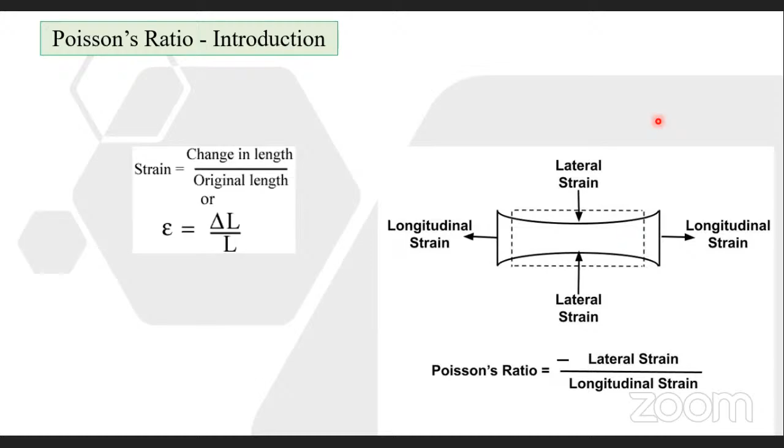So, for example, the length is 10 centimeters. On pulling, it becomes 15 centimeters. In the contraction direction, consider it having 5 centimeters, so it will change to 3 centimeters. So there is a change in dimension. The change in length divided by the original length gives the strain, where change in length is the difference between the final length and the initial length.

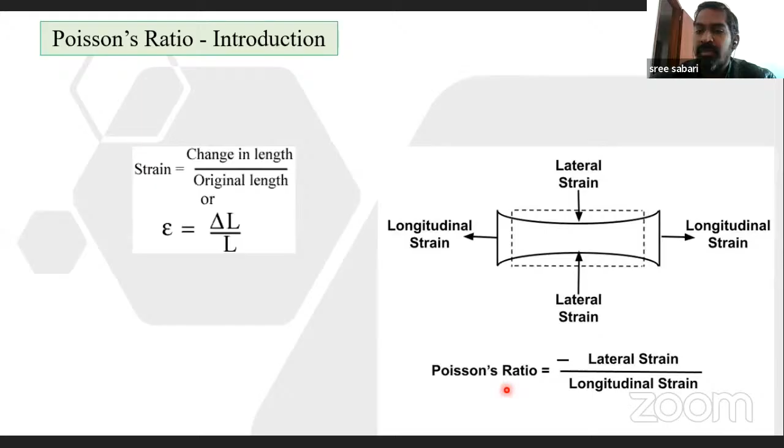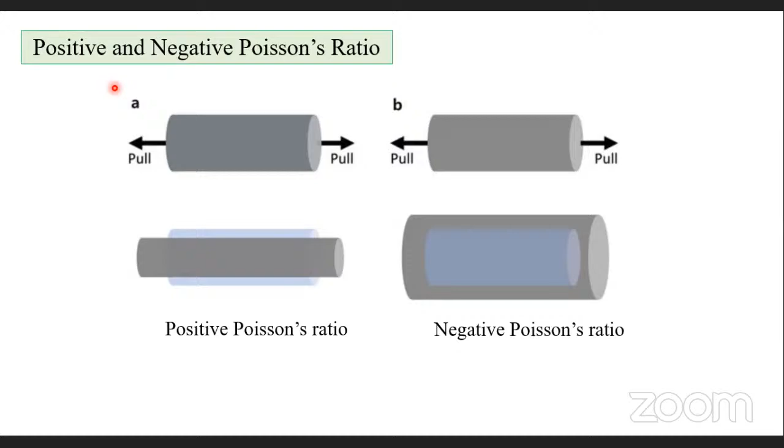With these equations, you can calculate the strain, and the strain can be used to calculate the Poisson ratio, which can be mathematically represented in this way. We have two terminologies: positive Poisson ratio and negative Poisson ratio. The positive Poisson ratio is the conventional one seen everywhere in engineering systems, not only there but even in the chocolate wrapper, you can see the positive Poisson ratio.

But there is another concept called negative Poisson ratio. In this figure B, you can see the schematic representation of the negative Poisson ratio. If I pull a material, it will try to expand, which is converse to the positive Poisson ratio. So when I pull or push the material, an inverse thing happens in the cross-sectional area. In the negative Poisson ratio, if you pull a material, an increase in length happens in this direction as well as an increase in length in this direction too, so the diameter is increasing. This is a negative Poisson ratio.

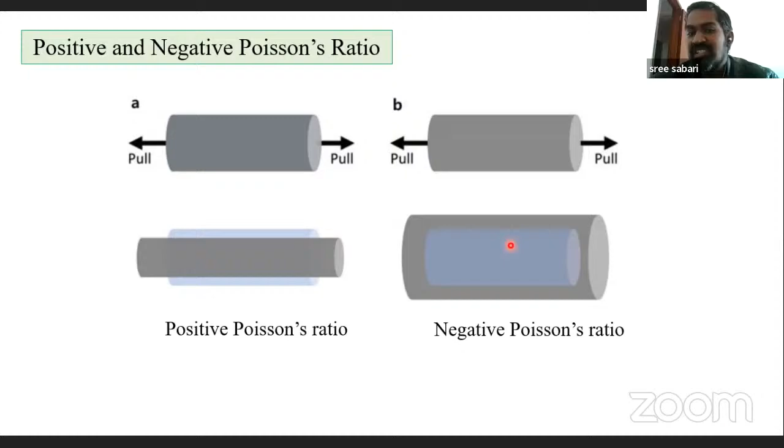Just think, in this case, if instead of a compression or a reduction in this cross-sectional area, you have an increase in cross-sectional area, will the game end soon?

No, the game will extend, which means the failure will extend, which means the material or the structure will remain for longer time.

So coming to here, if you see the various engineering materials in practice, you can see foams, cork, rubber, plastics, and other materials like steel, carbon fiber.

In these materials, you can see that the Poisson ratio value lies between 0 to 0.5. So if you are a mechanical engineer, you might come across a lot of calculations for understanding the stress or strain or the stress distribution.

You must come across the Poisson ratio value, and we used the Poisson ratio of 0.3. So for the metals, most probably it is 0.3, and it lies plus or minus like 0.05.

0.3 plus or minus 0.05. So if you see the steel, 0.3 is the Poisson ratio.

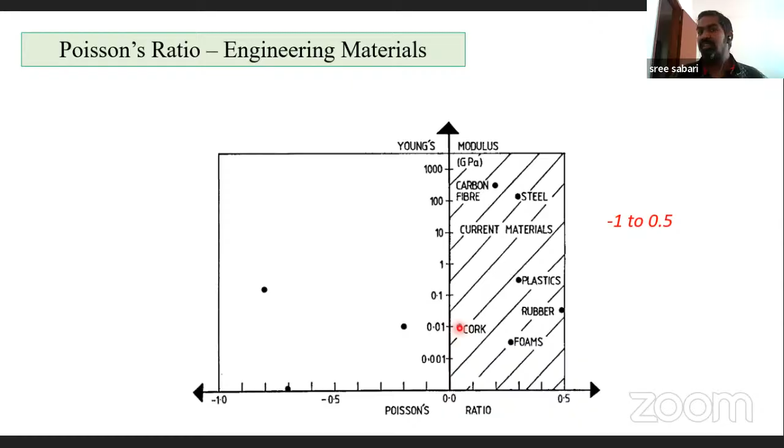And if you have a lower Poisson ratio in the positive system, which is near 0, it's neither positive nor negative. So you won't have any kind of thing. With respect to this expansion and contraction, we can see a lot of applications.

Coming to the scientific database, Scopus is a scientific database where we can see the number of research or amount of research published in a particular area.

So this proves that this material is having a lot of potential for various applications.

Okay, so coming to this Poisson ratio, as I told, the Poisson ratio is going to enhance the property. So how is this possible?

What are the things that are happening there when you are using an auxetic material? Okay, so the first one is the bulk modulus.

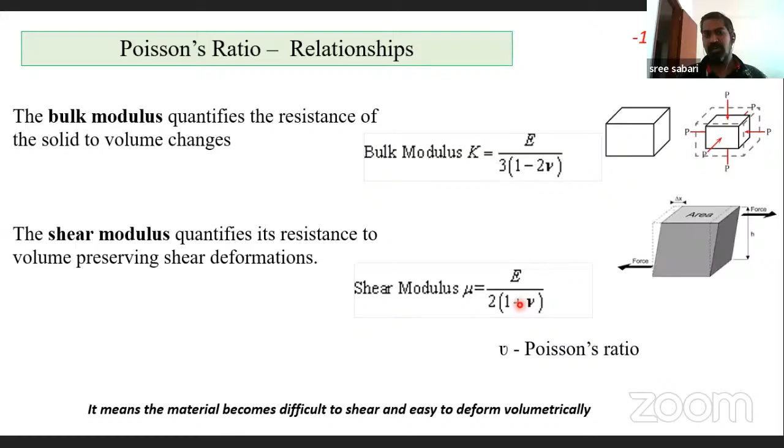Okay, so here you can see that if I insert 0.5 in place of the Poisson ratio, K will go to infinity. And if I place 0.5 here, you will have a lower shear modulus. So if the Poisson ratio is positive, you will have a higher bulk modulus and lower shear modulus.

On the other hand, if I insert -1 in place of the Poisson ratio, what will happen? You will have a different bulk modulus, but particularly notice the shear modulus. If I insert -1 here, 1 minus 1 becomes 0, and the shear modulus is going to increase. This is a very much wanted property of the negative Poisson ratio. It means the material becomes difficult to shear, but easily deforms volumetrically. By using this property, you can tailor a lot of other properties for different applications.

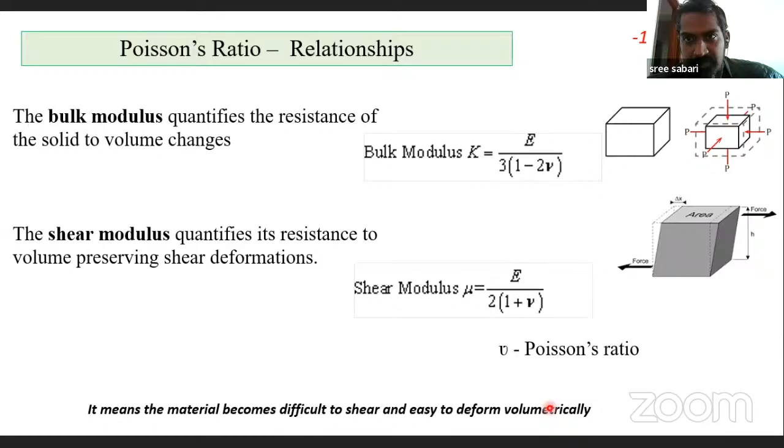Okay, so coming to this auxetic material. As I told in the very first slide, this auxetic material is not a real material like a metal or polymer. We know about a lot of material types. We have metals, we have composites; different types of metals are there, steel, aluminum, and we have composites, metal matrix composites, polymer based composites.

So here the term material doesn't represent the type of material; rather, the material represents the geometric feature. In other words, an auxetic material can be made using steel or polymer or composites or ceramic or whatever it may be. Someone hearing this word auxetic material will initially be confused, thinking this may be a new or novel material. This is not a material type. This is not the case. This auxetic material is a term related to the geometry of the material.

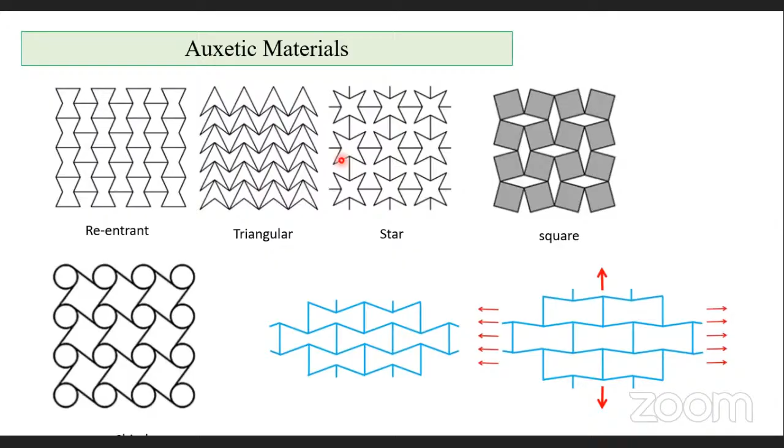For example, these re-entrant structures can be modified into hundreds and thousands of structures, and this triangle you can modify into hundreds and thousands of structures. So how can you modify that? For example, if you have a re-entrant here, in the corners, at this junction point, I can include a circle like this, so you can evolve a new geometry. And even in the star I can include a triangle like this, so you can invent a new geometry. So auxetic materials keep on going based upon the requirements. They can keep on changing, but these are the conventional or basic structures which give the negative Poisson ratio.

So how do these geometries give a negative Poisson ratio? These are also made with conventional materials like steel, aluminum, or composites or polymers. And how is this material different from conventional materials? Here you can see an example. This is the re-entrant structure, and on pulling this structure, what's happening? It is undergoing an expansion. What is happening in the conventional material? If you pull something, this region gets compressed or contracted, whereas here there is an expansion. How is this expansion happening? We will see from here.

In this figure, as I told, an expansion is happening here. I have magnified this image by only considering this inclined portion. Now I am showing the inclined portion alone, and you can see that there is a movement happening here. When you are pulling the material, there is an angle between the vertical member and the inclined member. When I am pulling it, this angle is trying to increase so that this member is trying to lift upward. So by changing these geometric profiles on loading, you will have an expansion in the center.

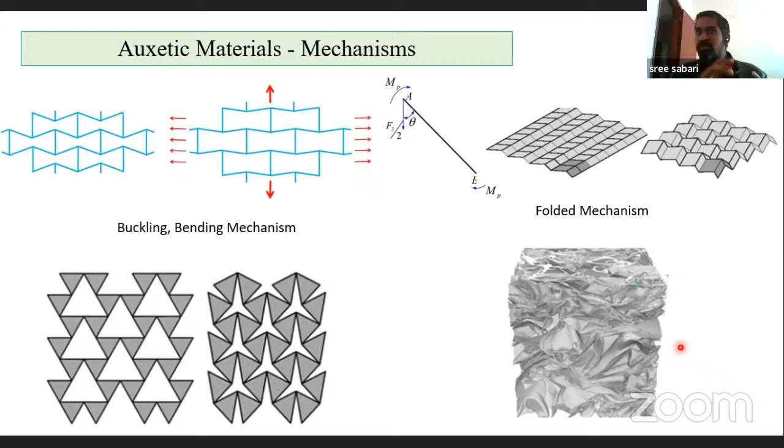The next one is the crumple type mechanism. Here you can see it's in a very crushed form. I can explain this with a real-time example. Take a paper, crush it, and put it on a table or throw it. After releasing the load, it will try to come back. So it is completely crushed on loading, and if you release the load, it comes back. That crushed way of material deformation can also be tailored to serve a desirable function.

Coming to here, let me continue with the various advantages. The first one is variable permeability. In simple terms, the materials have a lot of holes, which can serve some applications. Even your cloth has permeability. The holes there help the cloth breathe, so there will be airflow between your body and the outside. You can find permeability in a lot of applications.

I need to highlight one thing here. Seeing these various geometries, some people may wonder why honeycomb is not an auxetic material. A lot of people might have heard about honeycomb structures, which are applied in various applications, and because of their lattice, they have larger energy absorbing capabilities. It also has a cellular structure, regular and periodically arranged. So why is it not auxetic? Let me explain.

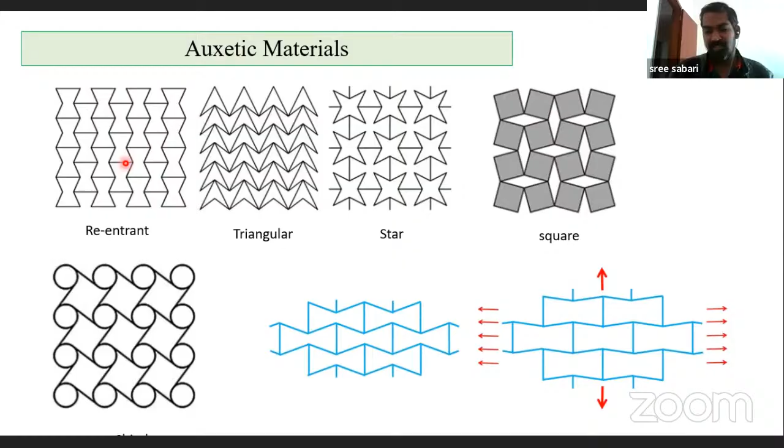So you can reach from this shape to this rectangular shape. Okay, so when you are applying a pulling or a pushing force over there, you will have a uniform increase in the void area in X and Y direction. So this is a very good property which can be used for various purposes.

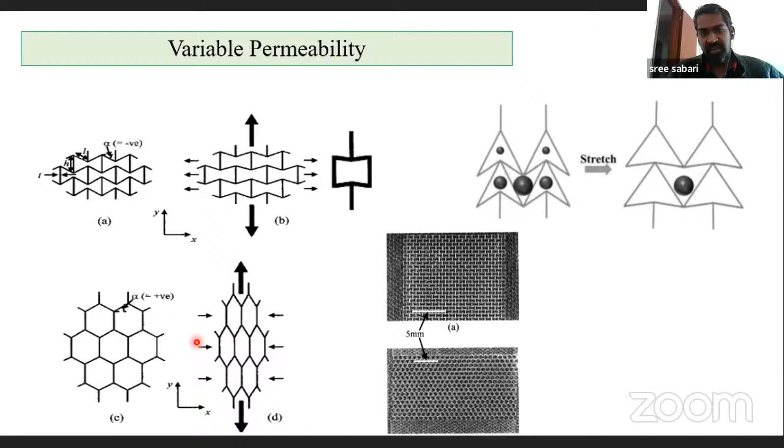Okay, so here in this picture you can see there are two filters made with the reentrant and the honeycomb structures. Okay, so the next beneficial characteristic of auxetics is indentation resistance. So what is indentation resistance? Indentation resistance can be related with hardness as well as with impact. Indenting is when you have a harder ram or harder material, and you are applying a force over a material, you can find a deformation. So that is the indentation.

For example, if I'm applying a pressure, you can see that my hand is indenting inwardly, which means a deformation is happening inwardly. Okay, so this is the indentation. So in real-time applications, a material should have a higher indentation resistance. Either it may be loaded at a lower load rate, or at a higher load rate. In both cases, we need this indentation resistance. So this auxetic material will have a better indentation resistance than the conventional material.

Okay, so how the conventional material behaves and how the auxetic material behaves, we are going to see here. So the first figure shows how a conventional material behaves. This is a ball indenter. Just consider this is a ball made up of some steel, and this is a rubber material, for your understanding. So consider this harder steel ball is indented against the softer material. So what is happening there?

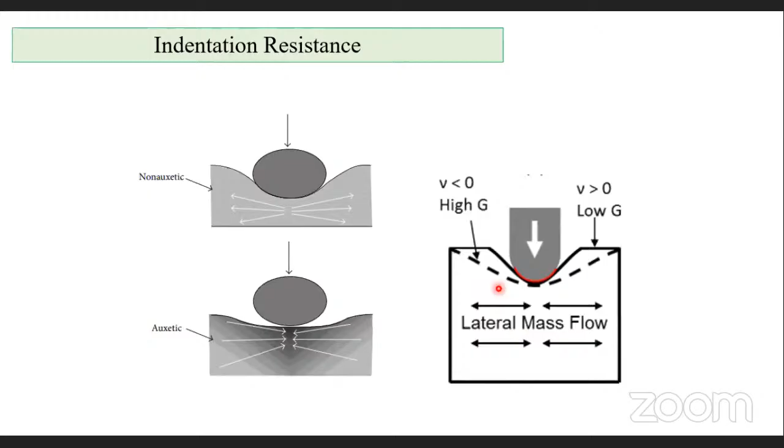Again, I'm saying that you need to tailor these mechanisms in order to make it beneficial. If I'm saying auxetic material, it is not completely beneficial. You need to tailor that, alter or optimize the behavior in order to fit your applications. As I told before, if you have a higher shear resistance, this will also influence the indentation resistance. So the Poisson ratio is associated with shear resistance, and the shear resistance is associated with the indentation resistance.

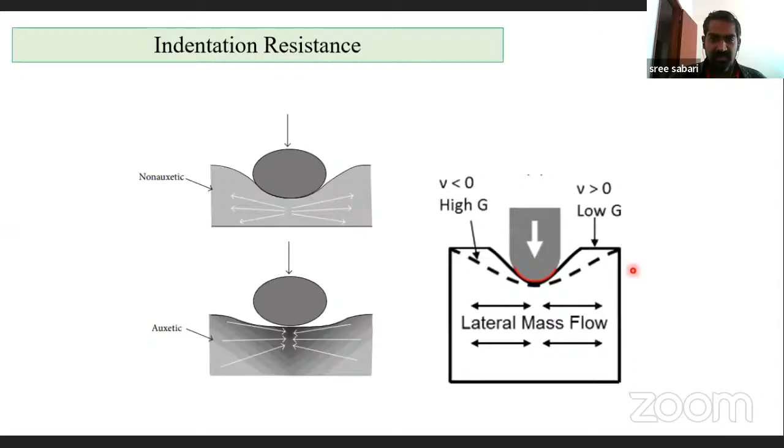And I will also give an example. If your car crashes into a wall, you can find a kind of deformation, not a crack. It will have crushing or bending, but not a crack. So in that way, these types of things are very much appreciated. So the next one is synclastic curvature.

For example, if you are going to apply this material for such applications, you can use this for a helmet, you can use this for a knee pad. It has a higher flexibility to deform to respective shapes.

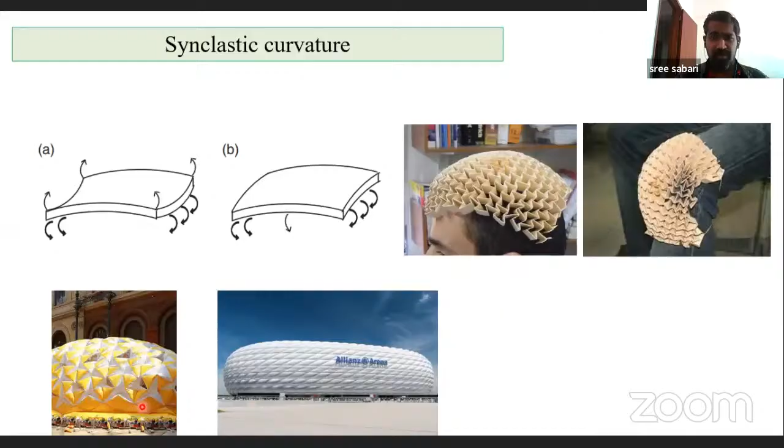So that's one type of application. Another type of application is this can be used for creating building structures, either in the form of polymer-based sheets, or for aesthetic looks. Here you can see two examples of using this curvature to build structures - you can create temporary or permanent structures, so you need to tailor accordingly.

under the hard shield. Why do we have that? It offers some kind of cushioning effect - that's the first reason. The second is it gives energy absorption capacity. On loading or impacting, if you fall down, it gets impacted there and absorbs some energy. That's why we use a foam.

So can an auxetic be a foam? Yes, of course, auxetic can also be a foam. But not all foams are auxetic. The auxetic foam needs to perform negative Poisson's ratio, but conventional foam just needs some kind of air voids or void regions - that's enough for conventional foam.

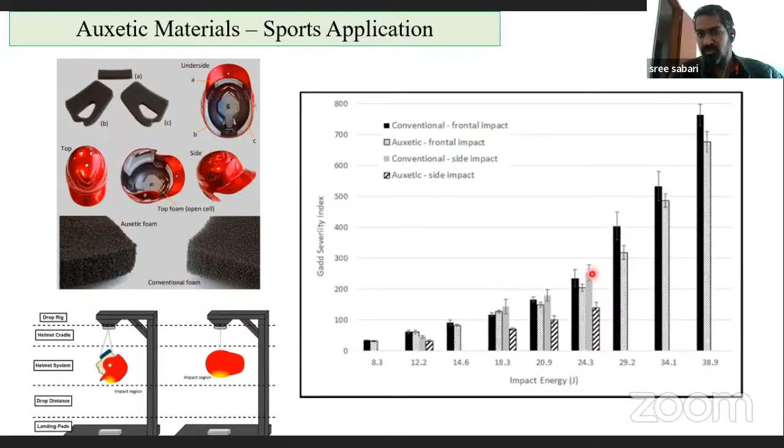In the side impact too, you can see the auxetic material has lower severity compared to conventional - especially in this case, nearly half the performance is improved. The value is nearly two times bigger for the conventional material, so this is a beneficial property.

And the next one is higher fracture toughness. This is also an important thing. As I told before, this material can avoid cracking, or can postpone crack propagation, or can avoid crack initiation. These are the terms related to fracture toughness. If there is a higher fracture toughness, there will be a higher resistance to cracking or crack propagation. So this is the idea.

So how is this happening here? In the conventional material, a lesser amount of energy is required for the crack to open. Consider this is a crack, you have a gap here. In order to propagate this crack to a bigger size, you need to open it. On opening of this region, the crack will propagate. For the auxetic material, the energy required for crack propagation is higher, so in that way it offers higher fracture toughness.

Here you can see there is a critical tensile stress. A critical stress needs to be created in order to propagate a crack. This has a relationship with the Poisson ratio. Since the critical stress is related with the Poisson ratio, we can tailor the Poisson ratio to negative and increase the resistance against fracture.

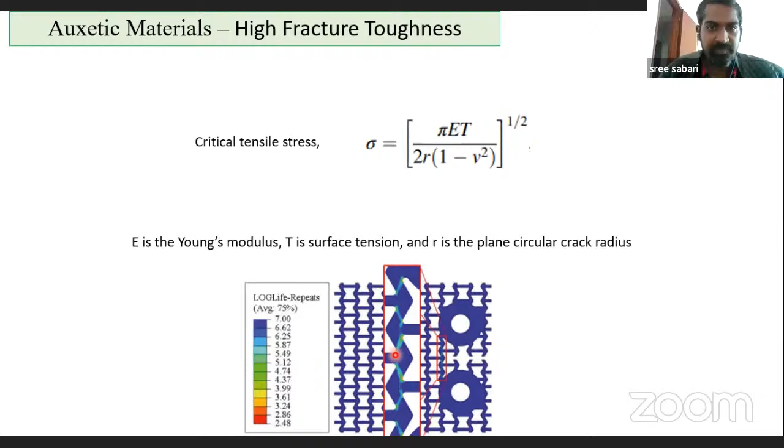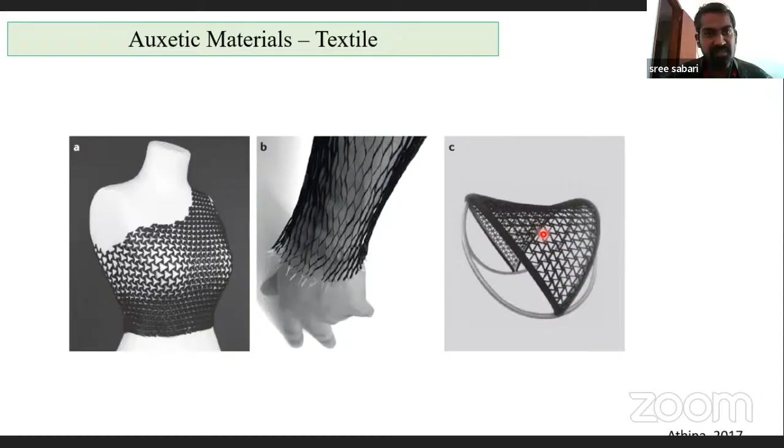Okay, the next one is how these auxetic materials can be used for defense. As I explained in the previous slides, it has a good energy absorbing capacity since it's a cellular type. And how this is possible, what is actually happening there, we can see that.

So in that kind of vehicles, you can use this auxetic material. Since this auxetic or cellular material, the weight of cellular materials is much less than bulk continuous material, that's one advantage. And the second advantage is it also performs good impact resistance or good ballistic resistance.

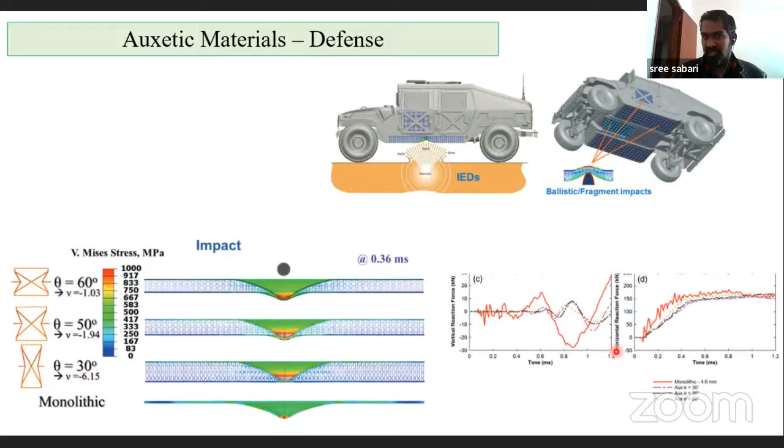For example, you can use this to arrest the vibration. You can decay the force and you can arrest the vibration. So it can be used as a shock absorber. You can use this in an auditorium. The sound is a wave. That wave can be decayed. So you can use it as a vibration arrestor. Then you can use it for acoustic purposes. So this has many more potentials.

Okay, so far I have explained a lot of advantages about this. Then you may have a question. The publications started arising from the 2000s. Now we are in 2020, almost a lot of years. Still, why does it not have potential in various applications? Because there are some challenges associated with this. This is a very important part of my presentation, because this will be useful for a lot of researchers or academicians. They can work on this as a project or some kind of proposal. So it has a lot of challenges which deteriorate its applications.

The first one is design complexity. As I mentioned in many of the slides, you need to tailor the geometry. That means not all geometries show a beneficial effect. So you need to optimize the geometry first, which means the shape of the auxetic material, like re-entrant, chiral. You need to select the geometry based upon its mechanism, whether it is bending, buckling, or rotating. Then after selecting the particular shape, you need to optimize the geometry parameters, for example the length, the angle, the length of the inclined members, the thickness of the strut. So it's very difficult to design it.

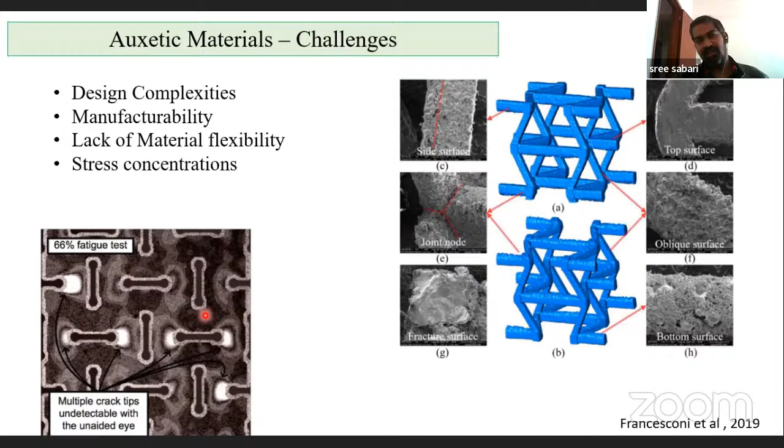The next one is stress concentration. If you are using a metallic auxetic, again, there is an issue called stress concentration, which is very important. Here you can see a picture of a specimen used for the fatigue test. There are a lot of sharp corners, which have high potential for crack initiation. In one of the slides, I explained that it has higher fracture toughness, and here I'm conversely saying stress concentration. So you need to overcome this stress concentration in order to achieve that good fracture toughness. So by this, I'm closing my presentation.

So these are the conclusions. Because of the unique way of deformation of auxetic material, it has high flexibility and adaptability to various applications. You can tailor the geometry and the material used for the geometry for various applications. So there is a lot of chance to explore. I wish everyone to read more about this, because this is a very big topic. Since the meeting consists of people from various streams, I explained it in a very limited way. I'm not going into any in-depth things.

So I ask you to look into it; though you are from different streams of engineering, this auxetic material will have some kind of application there. Even this can be used for piezoelectric materials as well, so people from electrical backgrounds can use it. This material can also be used as a heat sink in electronic systems. In electronic processors, heat generation is an important thing. This material has higher heat transfer capability; since it has a lattice, the airflow will be more. So electronics people can also work on it. There are a lot of applications.

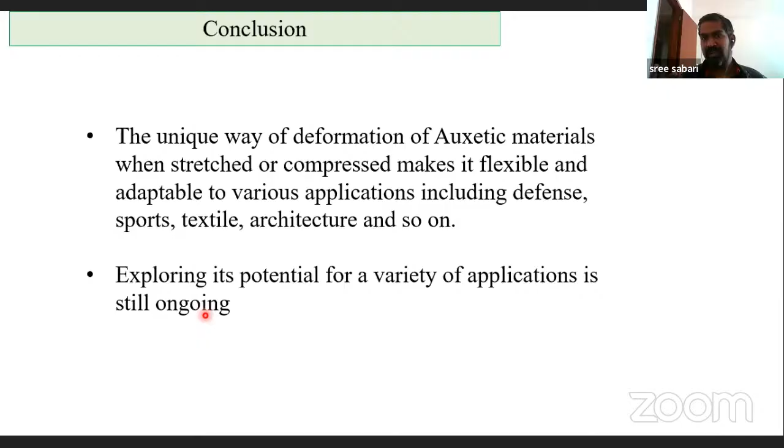A lot of biomedical researchers are also going there. Even for heart stents, people are now using auxetic materials. The stent will expand in order to fit the region, and a lot of other ergonomics-related biomedical research is also going on. Like I explained in one of the slides about the chair, it can accommodate different sizes of people accordingly. So it has wide potential. Everyone has some takeaway from this presentation, I believe. So I'm inviting you to have a discussion or some queries from you.